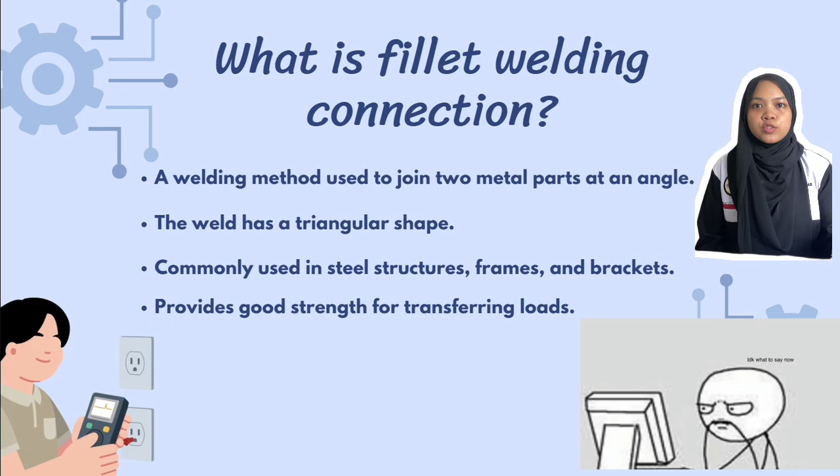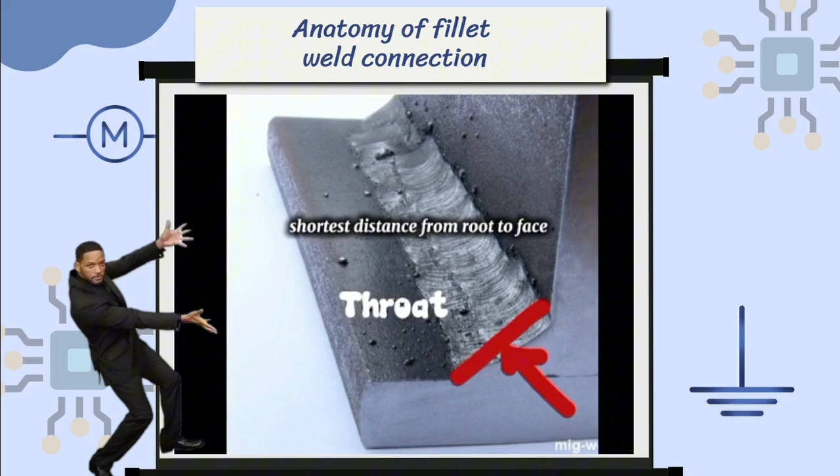Okay, now let's take a look at the video about the anatomy of a fillet welding connection that we have prepared. You guys can see. This video shows the main parts of fillet welding, such as the weld face, weld toe, root and leg length. By understanding these components, we can better understand how a fillet weld works and how it provides strength to the connection.

I will explain the purpose and function of welding in steel structures. The purpose of welding is to permanently join two or more steel members together. It is also used to create a strong and durable connection between steel components. In addition, welding provides an economical and efficient method of joining steel structures.

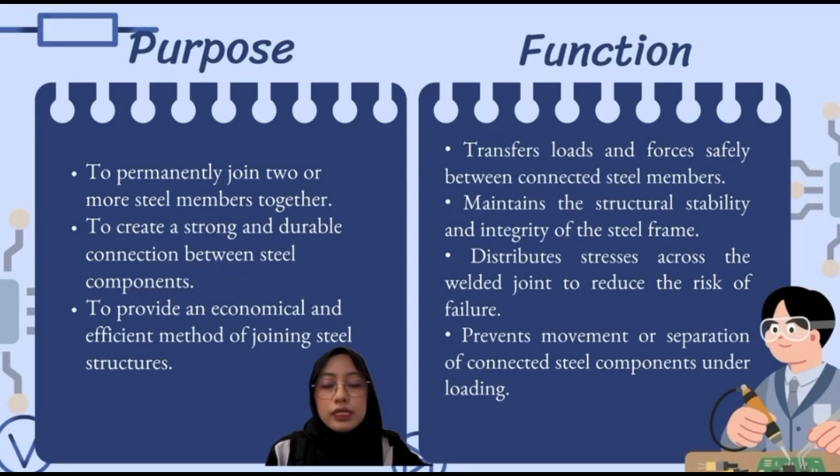Next, the function of welding. It is to transfer loads and forces safely between connected steel members. It also maintains the structural stability and integrity of the steel frame. Besides that, welding distributes the stresses across the welded joint to reduce the risk of failure. Lastly, it prevents movement or separation of steel components under loading.

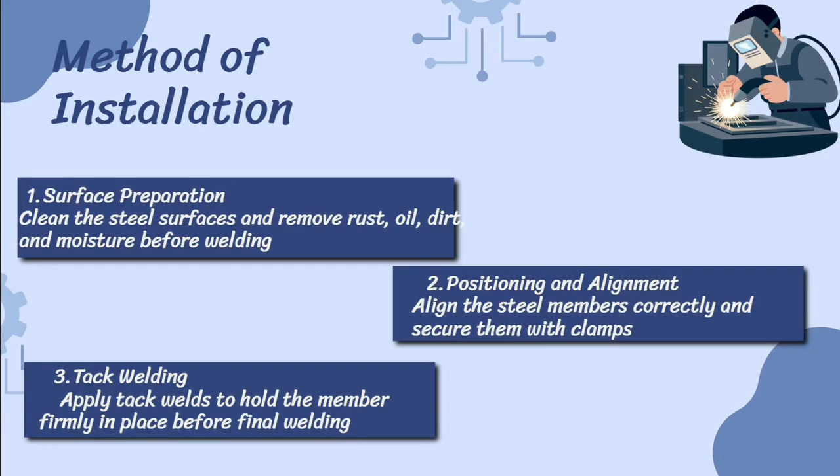Next, I will explain the method of installation of fillet welding. Okay, first, surface preparation. We clean the steel surface and remove all rust, dirt and moisture before welding. Second, position and alignment. We ensure steel members are aligned correctly and secured using clamps. Third, tack welding. Small tack welds are applied to hold the steel firmly in place before the final welding.

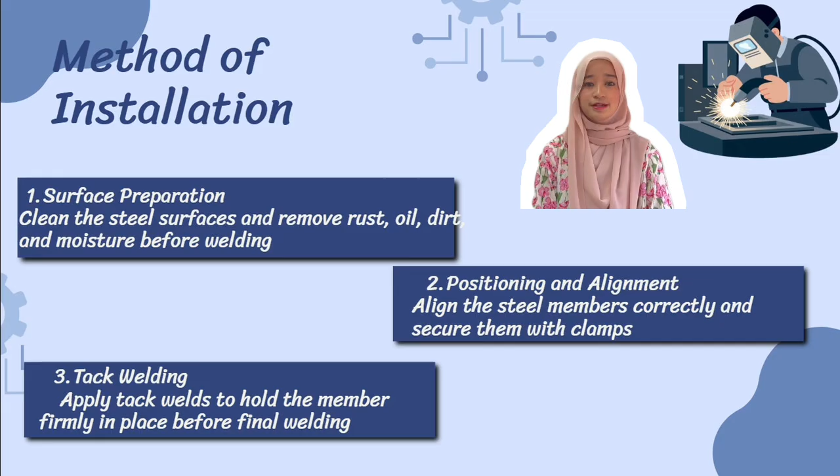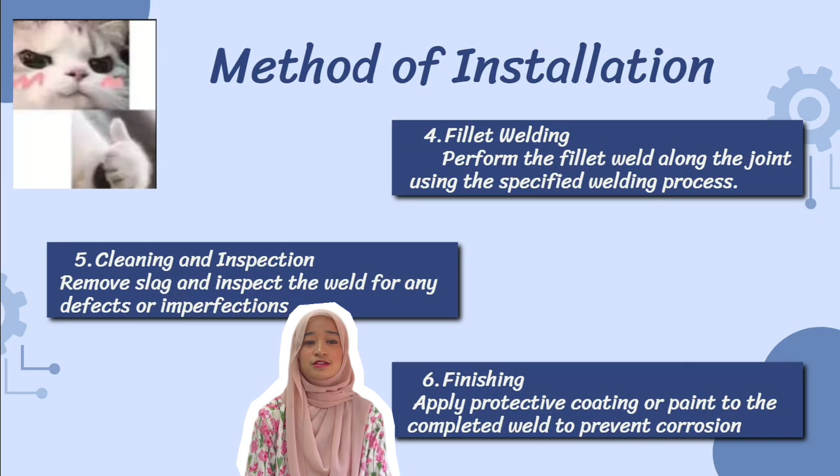Fourth, fillet welding. The fillet weld is performed along the joint using the correct welding process. Fifth, cleaning and inspection. The slag is removed and the weld is inspected for any defect. Finally, finishing. A protective coating or paint is applied to prevent corrosion and improve quality.

Then, I will explain three common types of fillet weld joints. First, T-joints. Second, lap joints. Third, corner joints. Each type is used depending on the design and structural requirements.

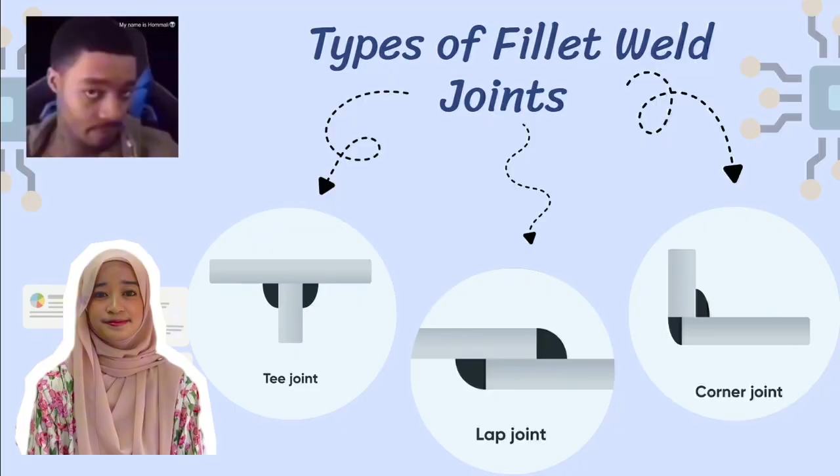Okay, now let's take a look at the advantages of fillet welding. First, it does not require extra preparation, so it can save time. Second, it has lower fabrication cost compared to some other welding methods. It can also be used for various joint types, making it very flexible. Besides that, it helps reduce structural weight and can be applied quickly on site.

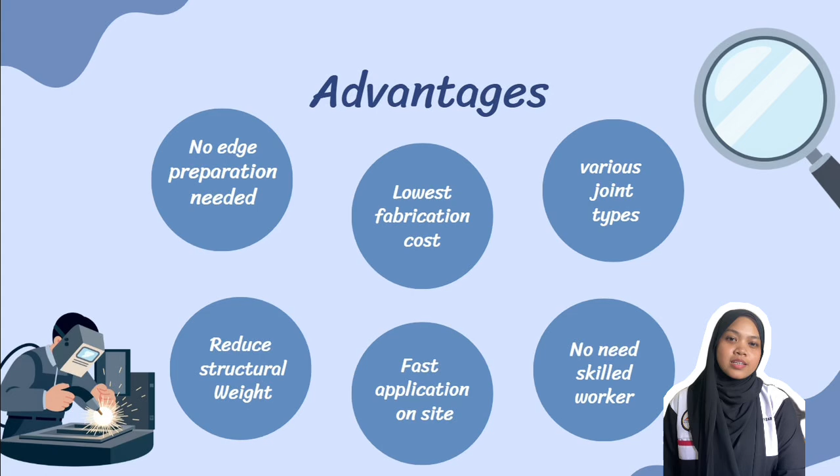Fillet welding is simple, economical, and widely used in construction and engineering. It is because it requires less preparation and is easier to perform than some other welding methods. That's all from me.

Although fillet weld connections are widely used, they also have several disadvantages. They require skilled welders to ensure good quality. Welding defects such as cracks or porosity can weaken the joint. The heat from welding may cause distortion of the steel members. Fillet welds are permanent and difficult to remove or modify.

In addition, the weld area may corrode if it is not properly protected, and for very heavy loads, fillet welds are generally less strong than full penetration butt welds.

In conclusion, the fillet weld connection is a reliable and cost-effective method for joining steel members. It provides strong structural support and is widely used in many construction projects. Although it has some disadvantages, proper installation and quality control can ensure a safe, durable and long-lasting steel connection.